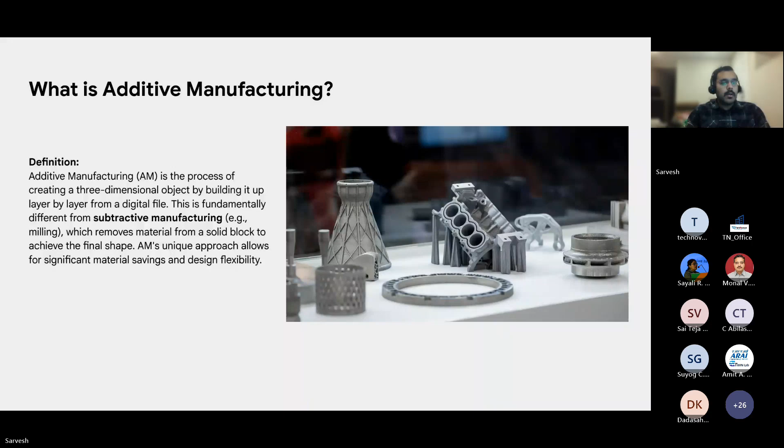Step one is 3D modeling, creating a 3D model using some kind of a CAD software, and we'll go deeper into this. Step two would be slicing the 3D model, so that it can talk to the 3D printer. The third step is actually printing the thing you want to.

Depending on the printer, depending on your part, there might be some post processing like cutting off the supports, or some cleanup or finishing. The most important step is also iterate, which I have highlighted in red, which is once you get your result, you evaluate and you reiterate and you build a better product or a better toy or whatever you have.

Some key technologies for additive manufacturing: there's fused deposition, that's one way. There's a photopolymerization process, that's a different technology. There's also powder bed fusion, which is laser sintering, and we'll talk about that.

You do have a variety of material choices. Most commonly, if you're a hobby level tinkerer, you will use PLA, which is biodegradable, widely available, and cheap. But you can also use functional plastics like ABS and nylon.

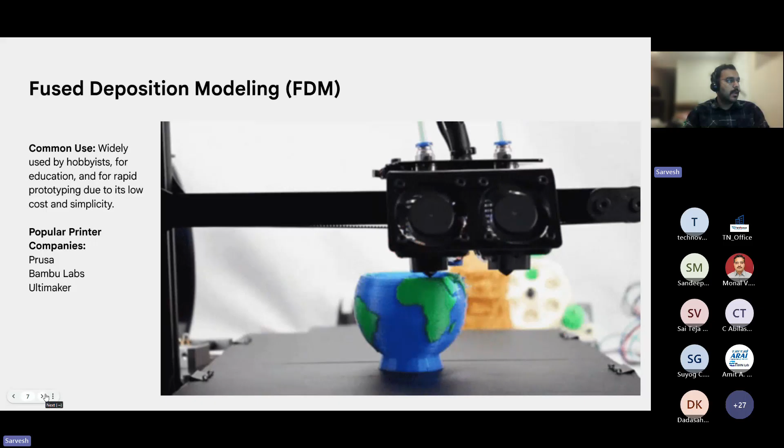That's the simplest, easiest type of printer you can have using fused deposition modeling. There's a different technology called photopolymerization. What actually happens in this kind of a printer is you have a bed which is full of liquid polymer, so that's actually your building material or building block, and you shoot a laser on the layer.

And it will harden the liquid resin. Then once one layer is done, you move up, you build the second layer, you build the third layer on top of it. This kind of shows you the process in a sped up way.

The way Formlabs does it is instead of moving the bed, which is traditional, it does move the bed, but the bed moves upside down. So it moves up, and it builds the part actually upside down. So this was the first layer and this was the last layer. And all these narrow vertical webbed lines you see, that is support material, and we'll talk about that in a little bit, but that is something which will need to be taken off in post processing.

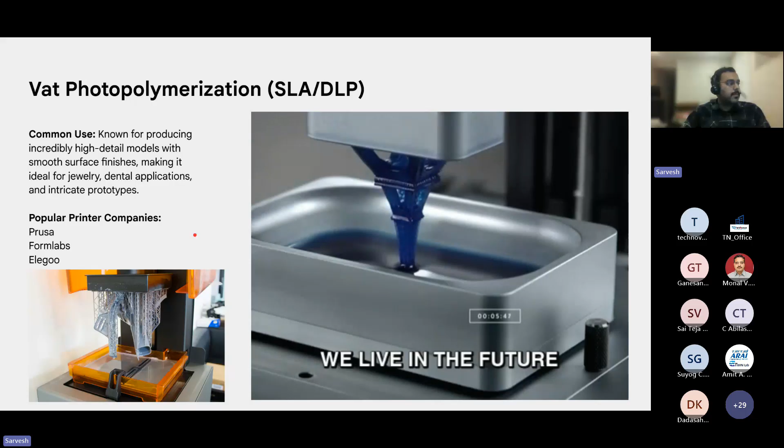Then we come to the third type, which is powder bed fusion, or SLS/SLM, selective laser sintering. Instead of a vat of liquid resin, we have a powder, so the bed is full of powder material. A high-powered laser selectively fuses the powder particles together. If you imagine a cross section, it will solidify the cross section, and the idea is the same: the bed moves down or the laser moves up, and you keep building layer by layer. The advantages are this process can be quite fast, and with a big bed, you can fill it up with parts, and it doesn't take extra time to build one part versus two.

There's a lot of cool applications for it. Popular printer companies are HP, Formlabs. There are a few others which are more commercial that I have not listed here.

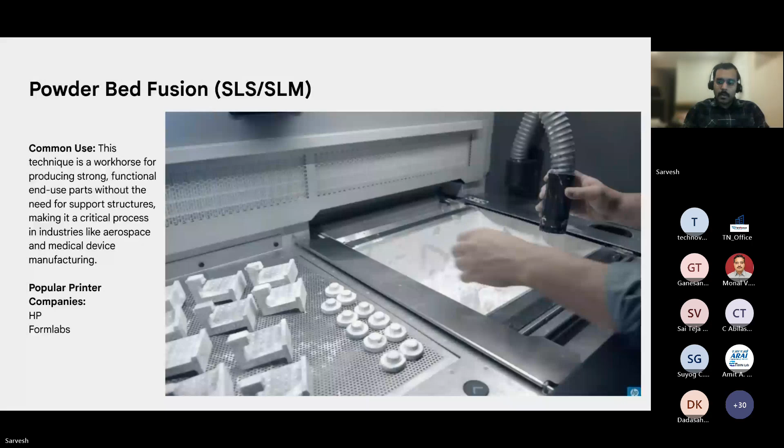As I come towards the end of part one, I just want to take a minute to discuss some advantages.

The first one is design freedom. Additive manufacturing removes many of the traditional design constraints. It allows engineers and designers to create complex geometries and intricate internal structures. Let's say you want some sort of lattice structure for weight saving, and you can consolidate multiple parts into a single component. For example, in my work I've embedded small magnets into a 3D printed part so that it's magnetic without having to glue in the magnet later. Some other advantages with design freedom: undercuts are allowed, so even if it's plastic, you can have undercuts, and there's no need for drafts or tapers.

The second one is design democratization. You don't actually have to be an engineer or designer, or study for many years, to build your designs. Any user anywhere can create what they like. It reduces the friction to go to market. You can test out your ideas, and if they're wrong, you can build them again. This is especially useful for startups. It moves design away from a specialized field in the hands of a few and makes it available to everyone, which is a great thing.

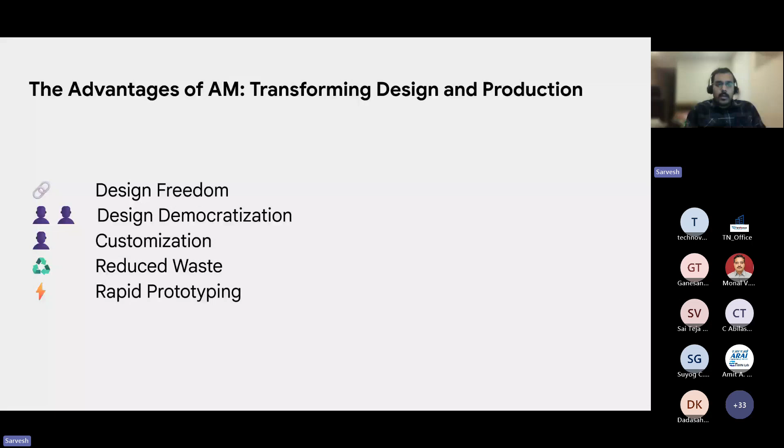So that's a quick introduction - I've deliberately kept it quick. Most of this information I talked about you can quite easily look up on the web or on ChatGPT, and it should give you a good direction.

You're not making millions of Boeings every day, so additive manufacturing really shines here. One example is Collins Aerospace, which manufactures turbine engine components. They've now moved to laser powder bed fusion technology. Traditionally they used machining plus brazing, and now they've moved to additive manufacturing.

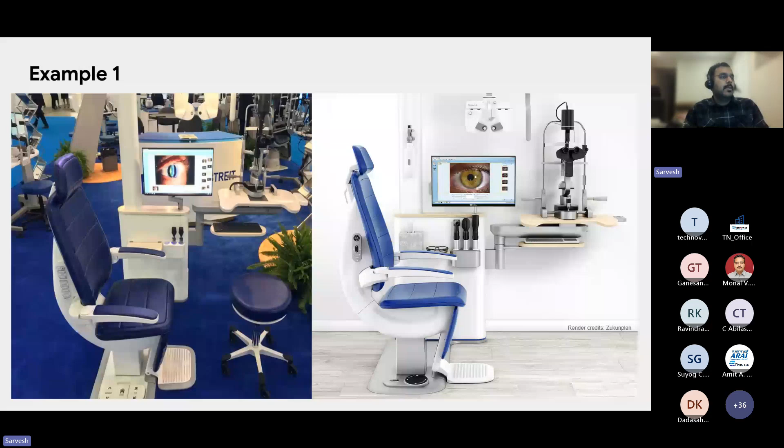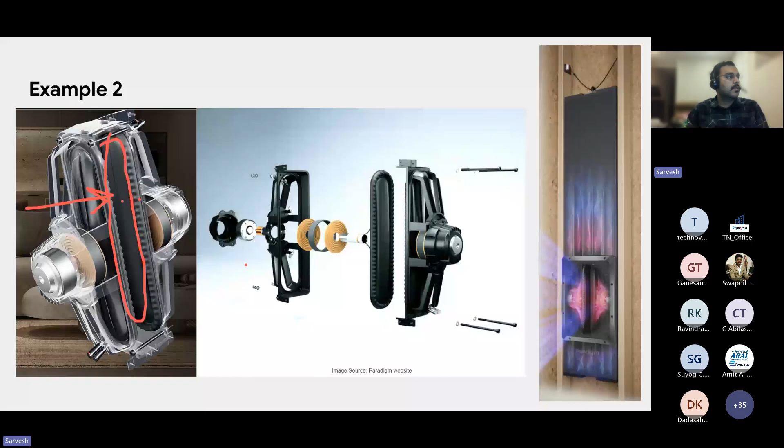Imagine it's kind of like a weight which you put on, a weight which covers this entirely, and then you put additional weights on this, and then glue these two parts together. So if you can imagine the jig from a side view, it would look like a block, but if I look at the front face, it will have the negative of that dust cap feature, which is a complex geometry.

To machine this would take a lot of time and effort, and we didn't want to do that during the pre-production phase. So the easiest thing was to 3D print this. The accuracy was pretty good and it worked for pre-production, so I'd call that a success. Eventually, we converted this into a jig made out of Delrin.

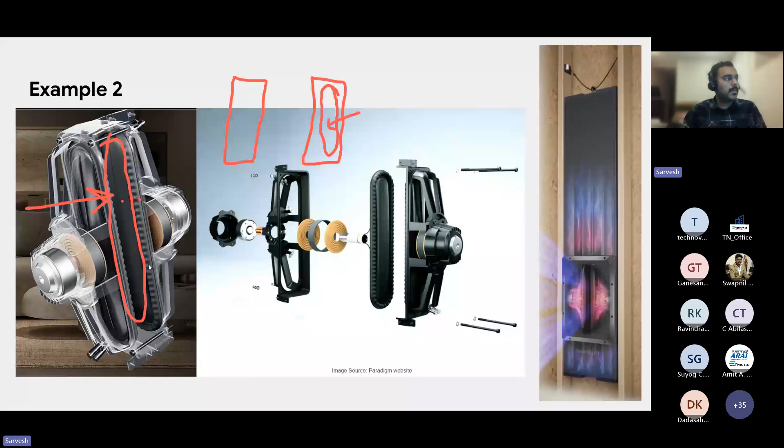The third quick example is this soundbar with magnetic spacers, which are right here and here. If you can see the contrast, there is a plastic part here, which we call a spacer with a magnet in it.

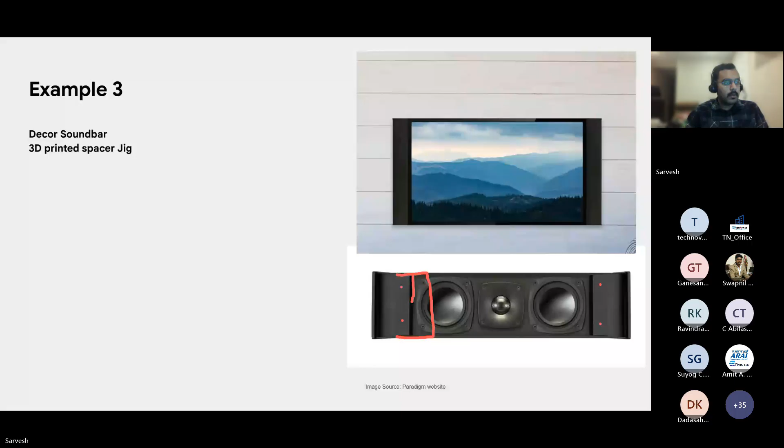So the design challenge was how to position this accurately. There are no locating features, and we didn't want to drill into the body of the soundbar because it would cause air leaks. We designed a jig which kind of looked like this: it had really thin fins at one end, and there were two holes here. So before the woofer is put in place, these holes can be utilized.

Additive manufacturing really shines here because getting a thin feature like this would be really hard using traditional manufacturing, and it would tend to break off. If we were doing it traditionally, we would add some shims on the sides to position it in the y-axis, and then this surface takes care of the x-axis for positioning this spacer part. But with 3D printing, we were able to get a very narrow width of this fin, which was around 2 millimeters. That was a great application.

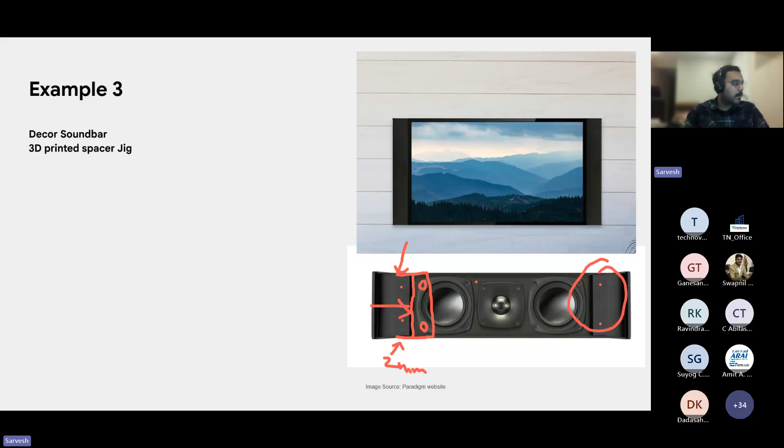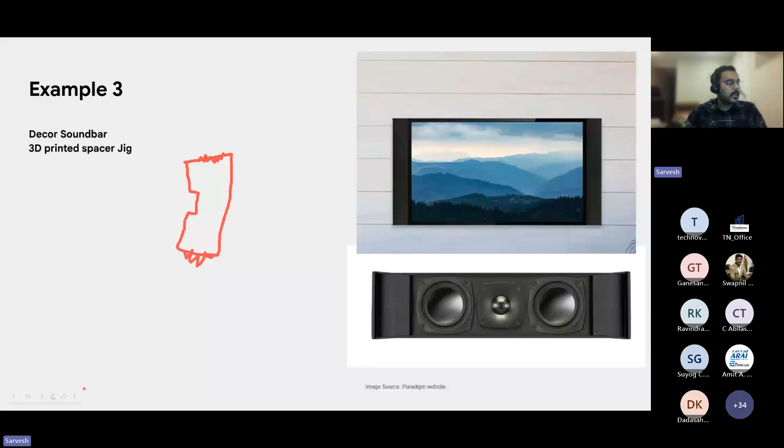We also did a lot of prototyping before approving this soundbar. This is an aluminum extrusion with aluminum end caps, so the extrusion profile kind of looks like this, with a wall hanging mechanism here, and some design lines around the edges. Sorry for my bad drawing, but we did a lot of prototypes just to select the size of this soundbar, what the dimensions should be, and presented it to marketing and management to get their buy-in.

So 3D printing helped us a lot, giving them an idea of what the volumes were going to be like.

We also extensively use 3D printing at my company for DFA, design for assembly. We 3D print parts together, even if they are not functional, go down to the shop floor, try to assemble parts together, and figure out faster ways of assembly. So there's a lot of value in using additive manufacturing for that purpose.

Lastly, I have a slide here which gives you some design rules and tolerances, which hopefully makes you think that 3D printing is great even in a professional setting, not just for hobbies. The source here is Formlabs, so you can check it out for more details.

Some things I want to point your attention to: I've got FDM versus... so you have FDM, SLA, and SLS. FDM is obviously the least accurate.

Wall thickness is up to 0.8 to 0.2 millimeters. You can get really nice embossing details, which gives you an idea of the capabilities - 0.6 millimeter wide and 2 millimeter high. For SLA, 0.1 millimeter embossed details is fantastic. For SLS, it differs by direction, but it's still in the ballpark of less than 0.5 millimeters. As far as tolerances on the parts go, these are listed here.

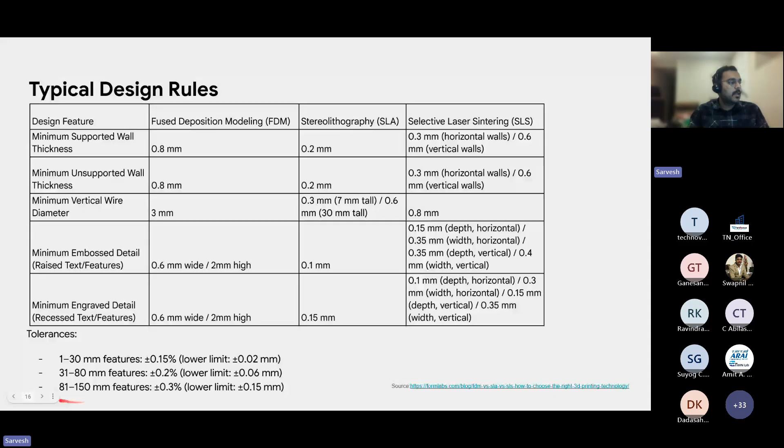This is one of the reasons why we're able to use 3D printed parts for some of our production parts. For small features up to 30 millimeters, it's plus or minus 0.15%, or there's a lower limit of 0.02 millimeters, just because of the nozzle thickness. Even for bigger features, it's still plus or minus 0.3%, which isn't bad at all, considering you can print your jig overnight instead of waiting a day or a couple of days.

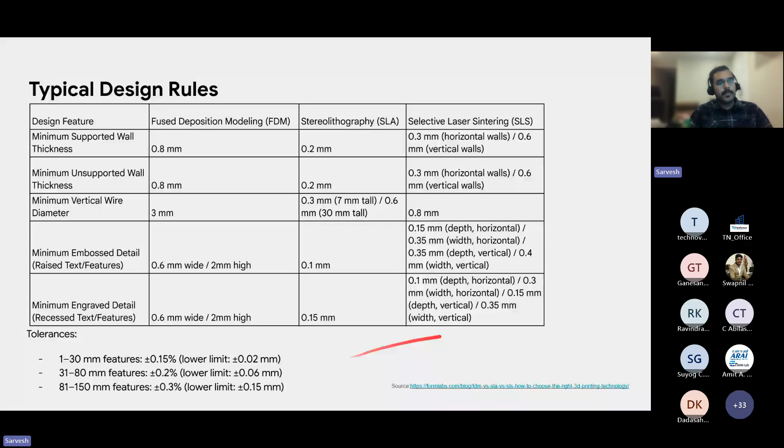So that was that - just some real world applications where I professionally use 3D printing for.

Now I want to give you a little bit more information on how to get started. Again, I'm going to keep this high level, because you can look this up on the internet and go deep into whatever area you have questions about. I'm going to bring up this slide again, which talks about the step-by-step process for how to 3D print parts, and then we can look at an example which I used.

My neighbor here does a lot of mandala designs - I've seen her notebooks, and some of the audience might be familiar with it. It's really hard work trying to sketch that in black and white, but I was interested in the geometric patterns. Obviously, it's very trivial to do this in 3D CAD because you can just sketch something, pattern it, and have all these dimensions. So it's really fast.

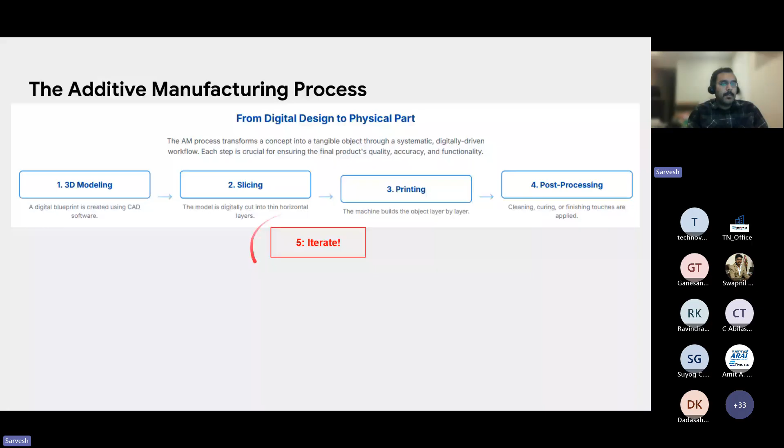Going back one slide, what I'm not showing is the iterate portion of it, because it actually took me two tries to get the dimensions just right, and then to also get the pattern just right. That's also very important, which not a lot of people talk about - getting failed parts, or parts which don't work, is just part of the process, and that's how you can improve and be better.

Some of the other things I've used personally are cell phone cases, cell phone holders, toys, some bicycle parts, including washers. We have a dishwasher which had a sensor failure because the sensor mounting bracket broke. So I just measured it, 3D printed it, mounted it back, and it's been working great for the last 1.5 years. So I'm going to call that a win.

So, 3D modeling, if you're not aware, there are a few commercial modeling softwares, SolidWorks, CATIA. There's a lot, and there's a lot of new ones coming in. If you're a professional, you probably have access to one of these at work. If not, you can always request a trial just to get a feel of it.

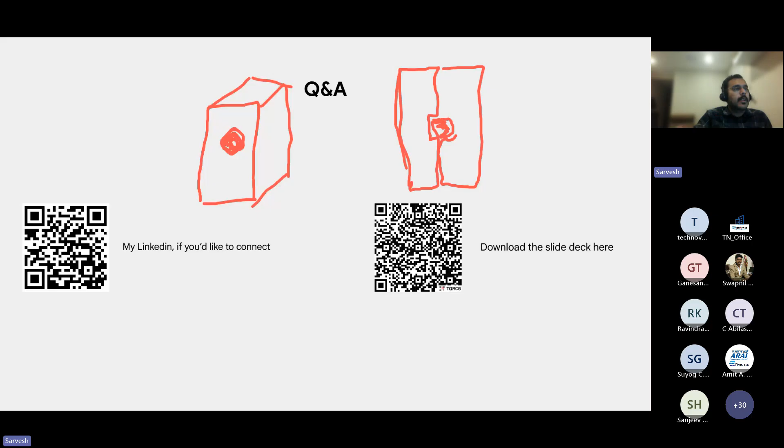And I had built another pocket here so it wouldn't interfere with the magnet. One of the tricks was to also tape the magnet in place, because otherwise it will jump off and hit the nozzle. So hope that answers the question.

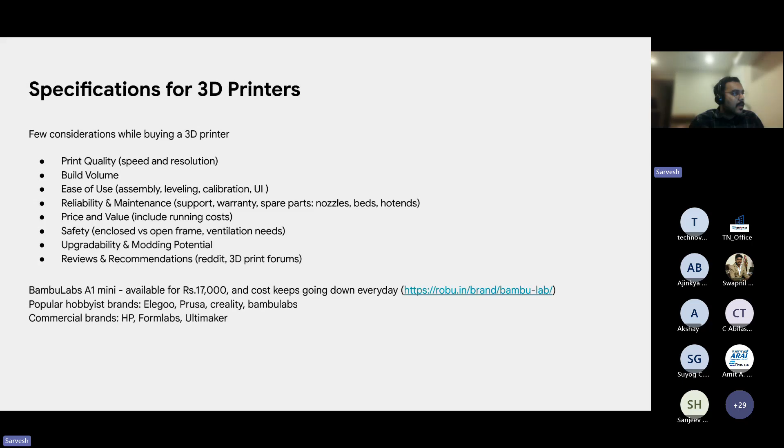Sure, I think I did kind of cover it. One thing I want to encourage everybody here is the slide I had about real world applications. What I want you guys to focus on is what will you use it for and where do you see value? And I think the best way to learn is by doing.

So I would encourage you to actually try to print parts, think of problem solving where you could use additive manufacturing just to get started, and buy a printer, get your friends to buy a printer, get your workplace to buy a 3D printer for you, and see what it unlocks for you guys. So that's all I had.